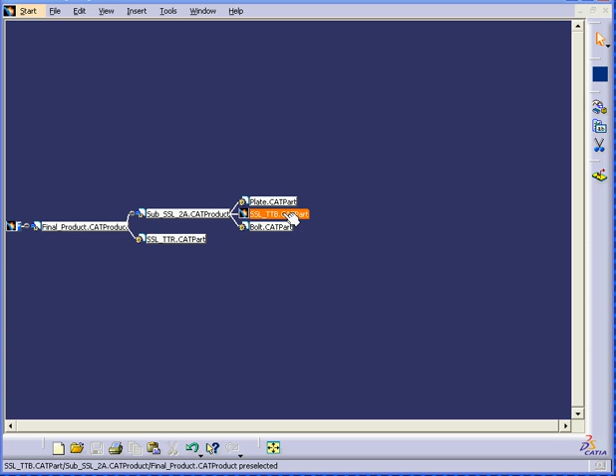We seem to be missing a part. Let's click the desk to go find it. Right-click on this part which appears to be missing. Select Find. And here's our part. Open it. Now let's close the desk. And here we have our components.

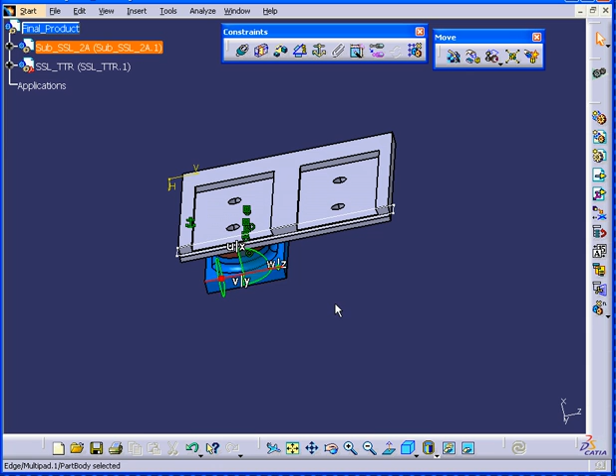Next, we're going to use the compass to position the components. Now we need two of these components for this assembly. Let's right-click and copy. Right-click and paste at the assembly level. You'll notice that when I copy, I click at the component level, but when I paste, it's at the assembly level.

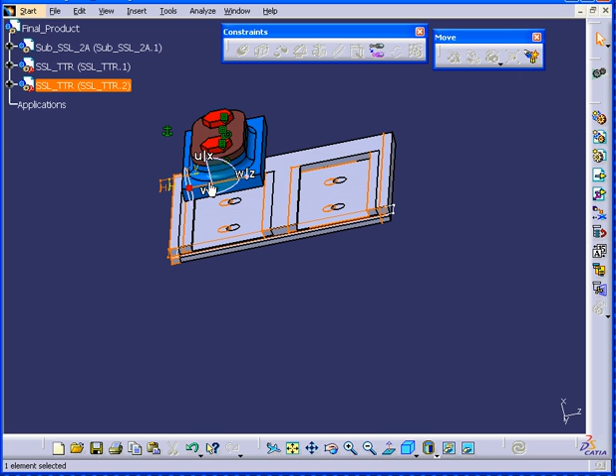Now on the component I just highlighted, let's move it. Oops, it's actually not highlighted. Okay, I see what's happened. I've copied the wrong component. All right, let's fix this. Right-click. Let's go back to the assembly level and delete the component. Now let's go get the right one.

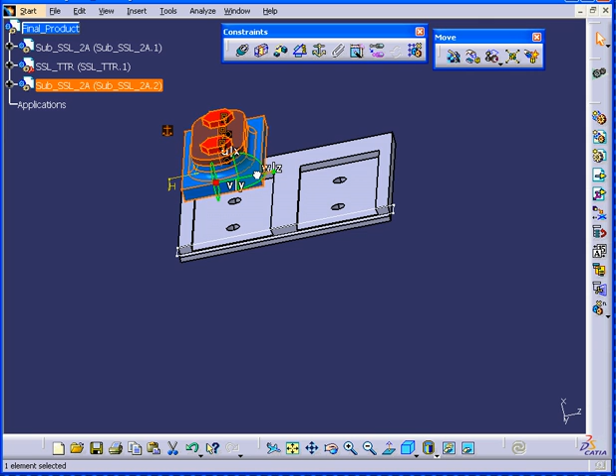Right-click, copy, and back to the assembly level where we paste it. Okay, now we've got the right component, and once it's selected, we can move it. Okay. Now let's rearrange our tree. Move it down, apply, click OK.

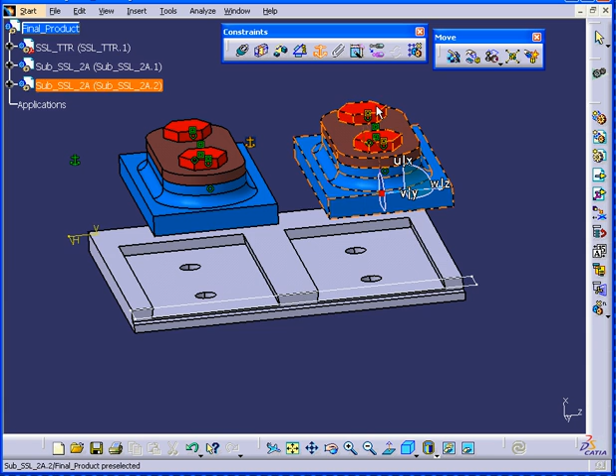Now let's use Fix Component and fix this component. We do need to hide these bolts. So let's right-click after we expand the specification tree. Selecting Hide Show. One bolt is moved to No Show. But we do need all four to disappear, so let's bring this back.

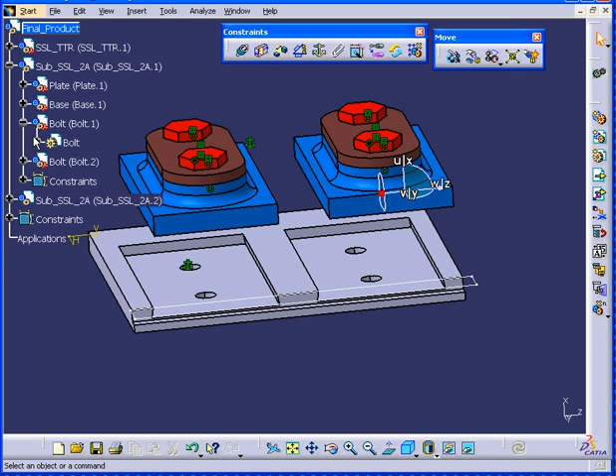And let's go deeper to the part body level. Right-click, Hide Show, and now as you can see, all four bolts are hidden. All right, we're going to constrain our component now. First is the coincidence constraint.

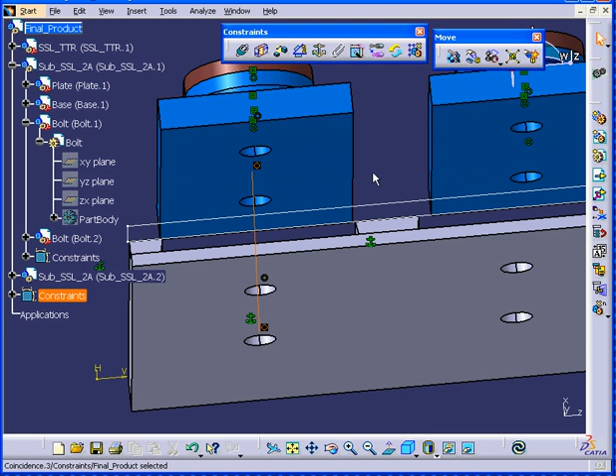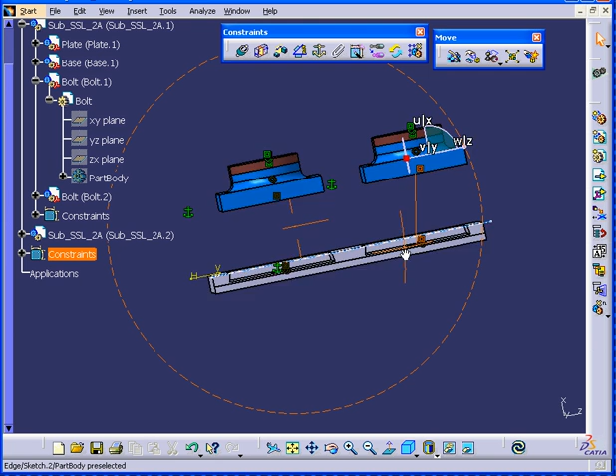To constrain this hole to this hole. Second, this hole to this hole. Third, this hole to this hole. And lastly, this hole to this hole. Next, we will apply the contact constraint, this face to this face. This face to this face. Let's hit Update. As you can see, our components are constrained.

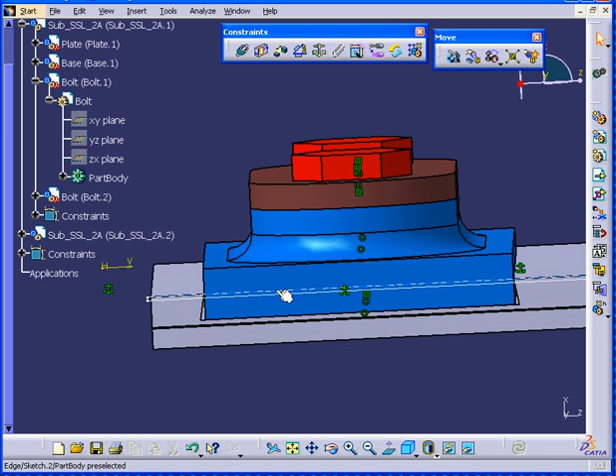All right, let's bring the bolts back. Right-click, toggle back to Show. OK. We seem to have a problem here. It looks like this part doesn't match the base exactly. Well, let's replace this component.

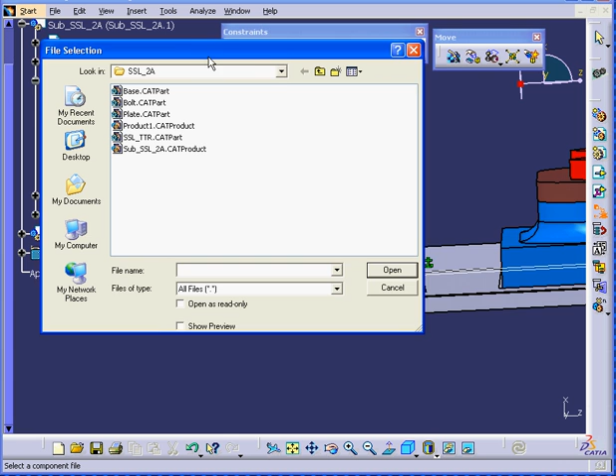I can use the Replace Component function from the Product Structure toolbar. Or I can right-click on the component, select Components, select Replace Components. Now we navigate to find the right component and we open it. CATIA prompts us, asking us if we want to replace all instances of the selected element. We will choose Yes and click OK. Now, as you can see, it fits perfectly with the base.

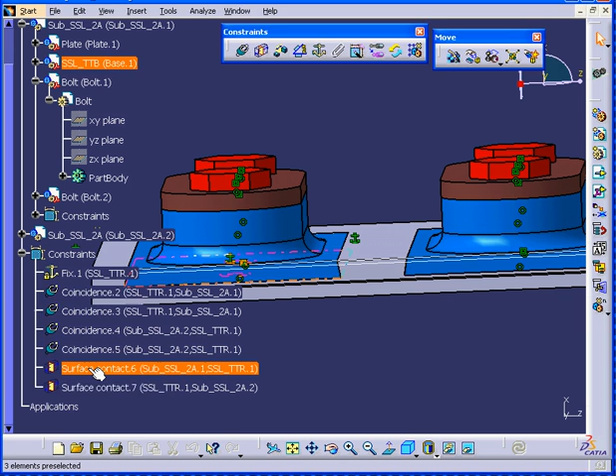Sometimes when you replace components, some constraints will get broken. If that happens, you will see a yellow exclamation mark in the specification tree next to the component. When this happens, you have two choices. You can delete the constraint and create another, or you can double-click on the constraint and select More. And right here, you will see the word Disconnected. You'll need to click to reconnect and then click OK.

Next, I'd like to show you, let's collapse and expand the plate component. Okay. You'll see I'm in the Part Design workbench. I double-click on the plate at the part level. All right, let's add some chamfer to this part. Click on the edge, enter a value of 1/8 of an inch, hit Tab, and preview.

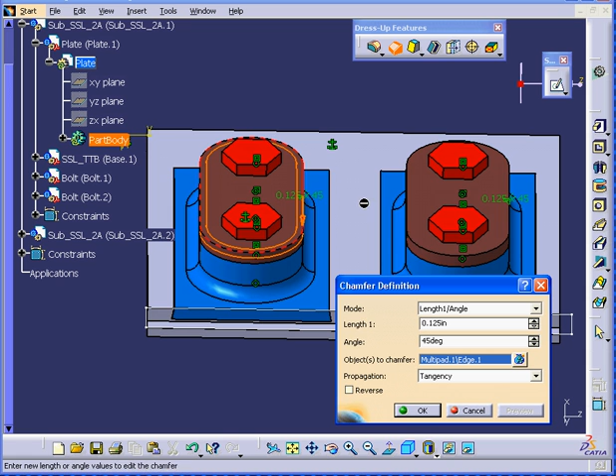When I click OK, you will see that the changes will be applied to this plate as well. As you can see, basically you can make adjustments at the part level anytime. After making your adjustments, you may go back to the assembly level and keep assembling your components. And this concludes our third tutorial on assembly.